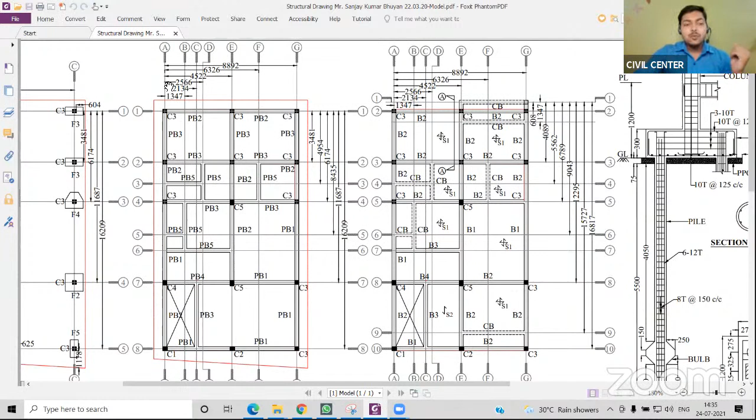Okay, so we have discussed the column positions, and now let's relate this plinth beam layout with the typical beam column layout over here. So you can see all the center lines are almost the same, but we also have a few new lines over here. Why so? Because in the horizontal direction we have the same number of center lines, but in the vertical direction you will find two additional center lines over here. Now why these two additional center lines are present, that we will discuss in just a few minutes.

Then the columns will be the same as they were on the plinth beam unless you have any floating column. So from the viewers, I would like to know what floating columns are. In this project we have not used floating columns, but if you are looking at a drawing like this and you find a particular column absent in the plinth beam layout and that column is present in the beam column layout, then you can understand that's because of the presence of floating columns.

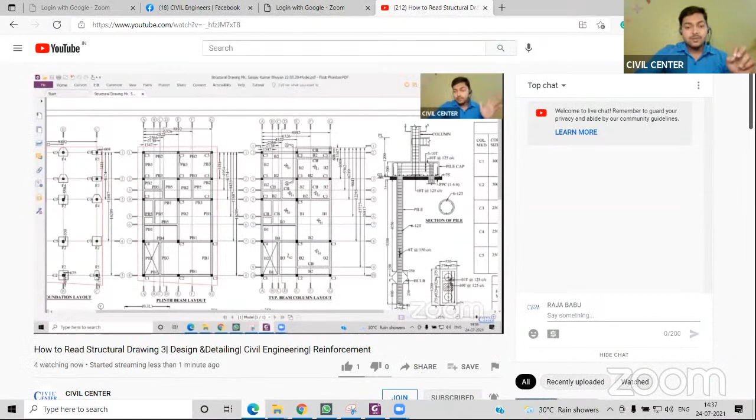Okay, so next, we have this beam arrangement over here. Now in the last live session I told you why the beams are arranged in this way.

So I have told you that the beams are present wherever we have the walls, and these beams are taking the loads of the walls. Okay, now there is one additional type of beam in our beam column layout, and this beam is known as

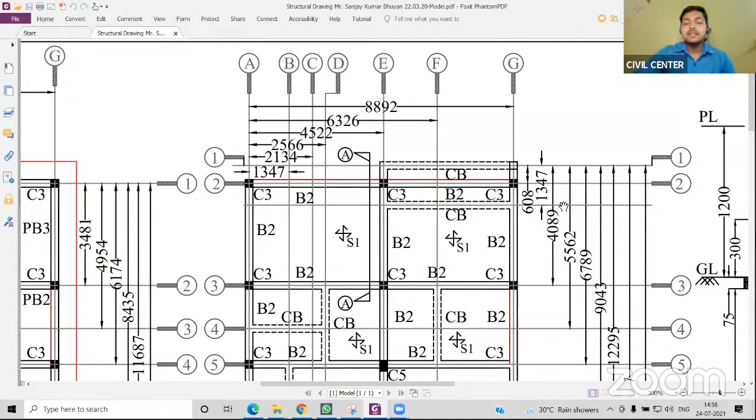Okay, so you can see over here we have these center lines, and we have taken the measurement from A to B, then A to C, and not from A to B and B to C. And this is done to maintain the accuracy while doing the construction, so that if you are making any error while marking any footing or any of the columns, you do not repeat the mistake in the next column or footing. So to avoid such mistakes, we have to go with this pattern of measurement. Okay, so this is to maintain the accuracy.

Now we have different types of columns over here, and from the column schedule, we know that we have these 5 types of columns. Okay, so guys, I think this is quite clear because I have explained all these things in the previous session also. Now what is the new thing over here? We have the conceal beam over here, and because of this new conceal beam in our structural drawing, we had to draw another center line.

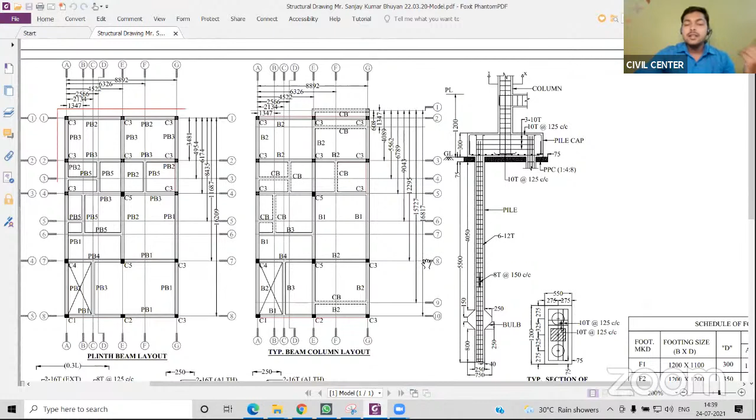And since we are drawing another center line, we will not go with the previous names over here, so we will rename all the center lines. Like previously, this center line 2 was center line 1 in the case of the plinth beam, so we go for the renaming so that we can easily do the measurements, and that's why we have additional center lines in the beam column layout. Okay, so because of the presence of the conceal beams, this happened.

Now why do these conceal beams have to be provided? There is a simple answer for that. These conceal beams will take the loads of the walls. Okay, and what kind of walls? Over here you can see this is taking the load of the balcony walls. So these are just lighter walls. At some places you will find that this is a concrete wall.

In the balcony you can find brick walls, and you can also find some kind of handrails, which can be of iron or of steel. Steel is in demand these days, but there are also people who go for brick walls and also iron handrails.

Okay, so these are lighter over here, and these do not extend up to the complete floor, so they have a height of almost 3 feet to 3.5 feet. So they are lighter in weight, and we don't need an actual beam over there. So for that we are going for the conceal beam over here. Okay.

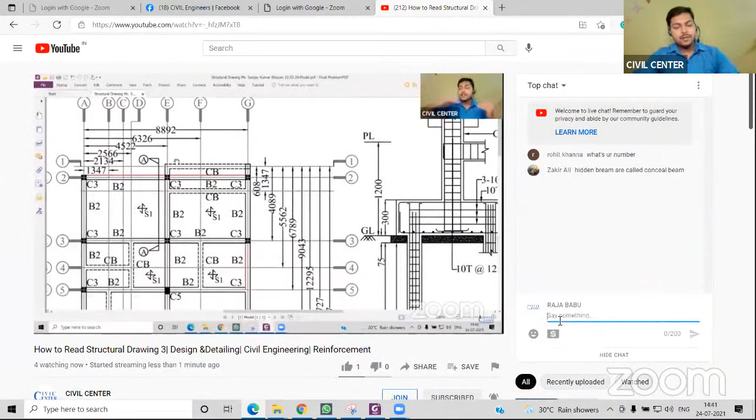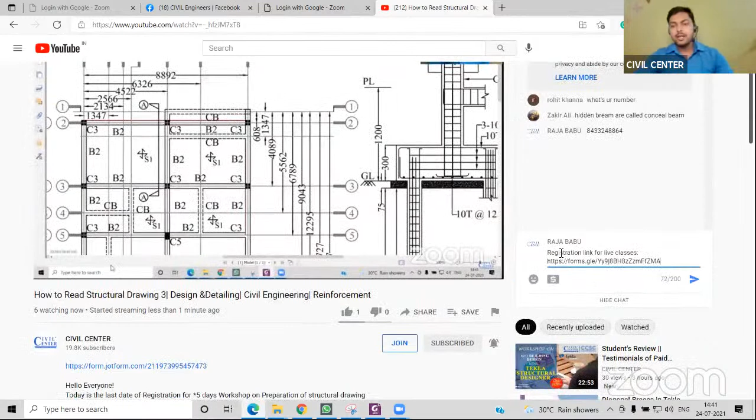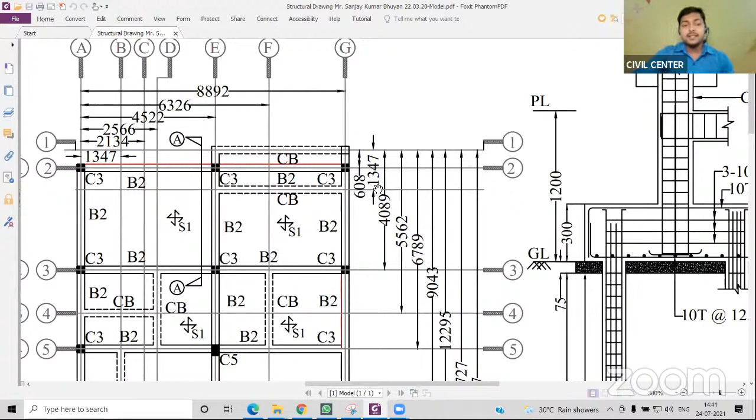Next we have Zakir Ali, and he is saying that hidden beams are called conceal beams. Okay, so that is a correct answer. So now the question is how we can hide any beam. And the answer is there in the beam column schedule. So we will just go to the schedule of beams over here, and we will look at the depth of the conceal beams.

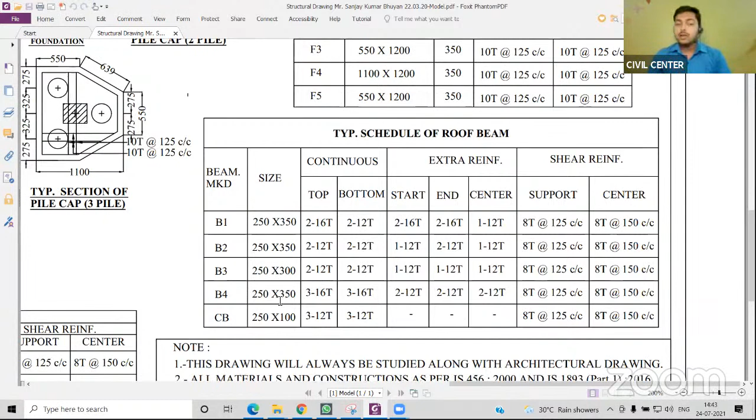Means if your slab is of thickness 150, then you can go for concealed beams of thickness 150. Okay, so the basic concept is the depth of the beam is equal to the thickness of the slab, and such beams are not visible, so they can be known as hidden or concealed beams. Okay, so that's the correct answer, Zakir Ali.

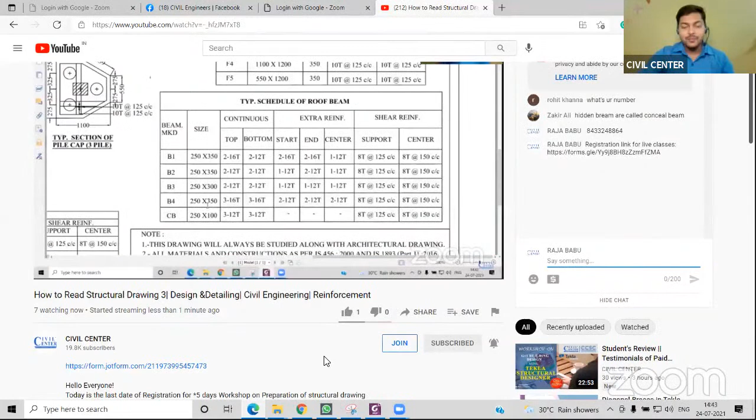Okay, thank you. Next, we can see that in our beam column layout we have new beams over here, and mostly these beams are concealed beams. And one more thing to be noticed: we have this cross sign over here. This is showing that no slab is present over here, that means the slab is absent. And this is a portion of the staircase, so in the portion of the staircase and lifts you will find this sign, which means the slab is absent in this portion.

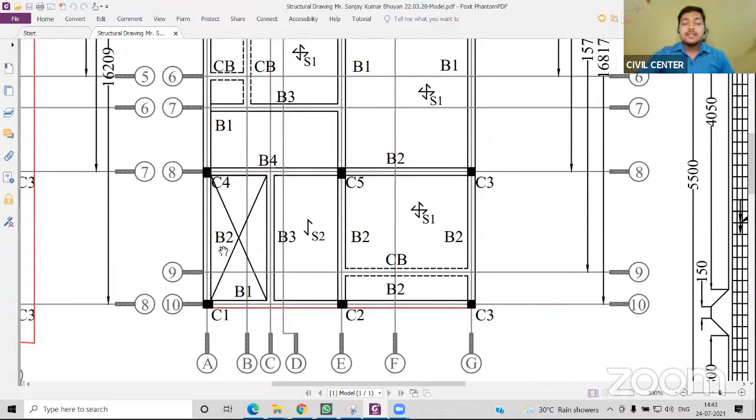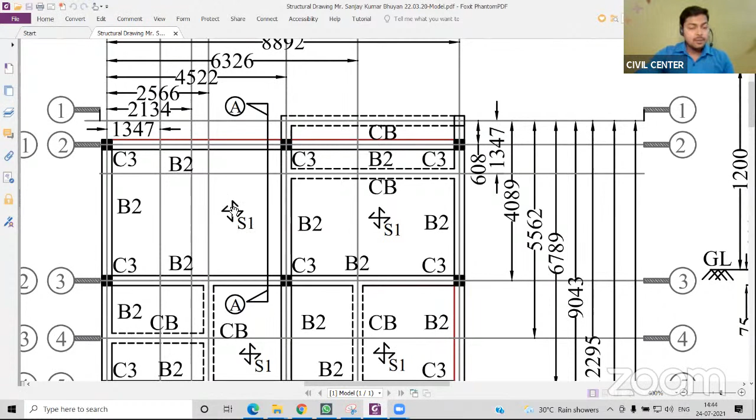So this is the way to study the beam column layout. Okay, and in all the portions where we don't have any cross sign, we have the slab present. Now we can see one more thing over here, we have cut out a section AA, and this is a section for the slab. So you can see we have a two-way slab over here, and this is the sign of a two-way slab. Okay, and this is the sign of a one-way slab. So there are basically two types of slab being used in this beam column layout.

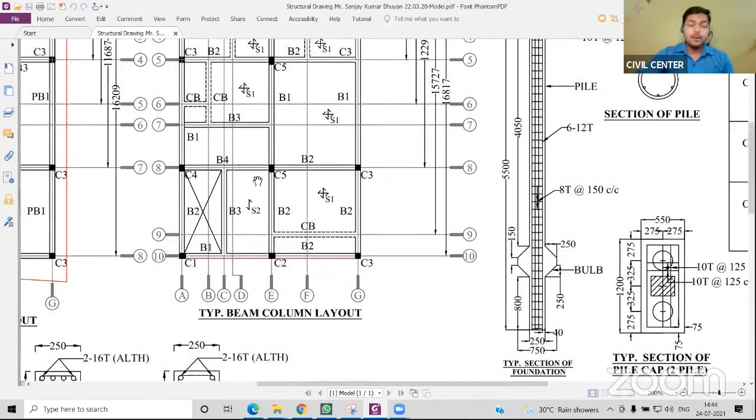Okay, so you can also go for the signs of the slab, and we will talk in detail about the slabs when we discuss them. Right now we will stick to the beam column layout and discuss the beams and the columns. The column has already been described. Now let's go to the schedule of the roof beam. So the concealed beam size has been explained. Now let's take an example of beam B1.

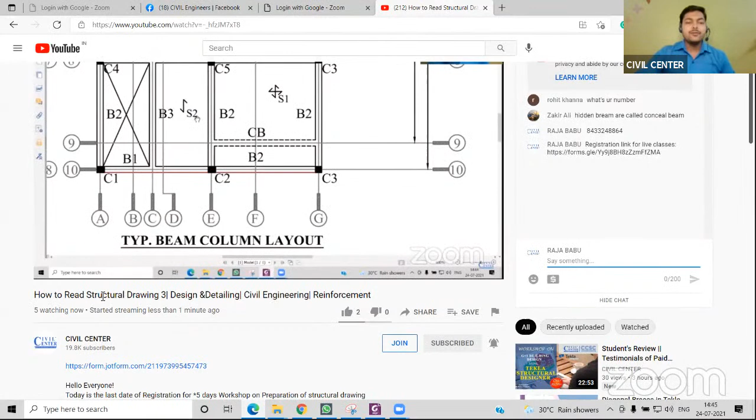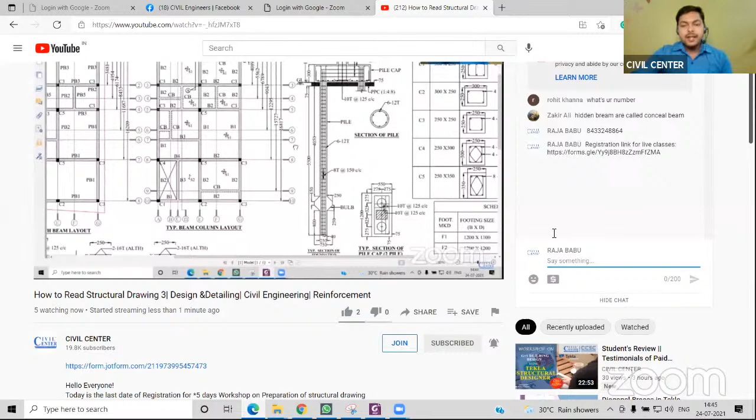Next, we have this beam B1, and over here you can see we have the size of 250 by 350, and we have three types of reinforcement. The first one is the continuous reinforcement, the second one is the extra reinforcement, and the third one is the shear reinforcement. Okay, so in the continuous reinforcement we have top and bottom, that is, reinforcement is present at the top and the bottom.

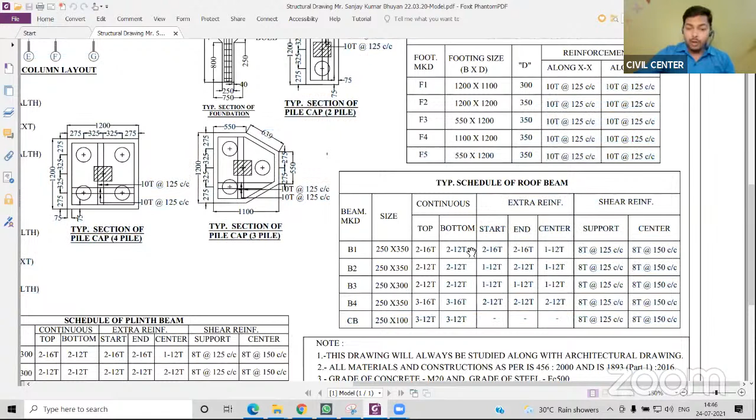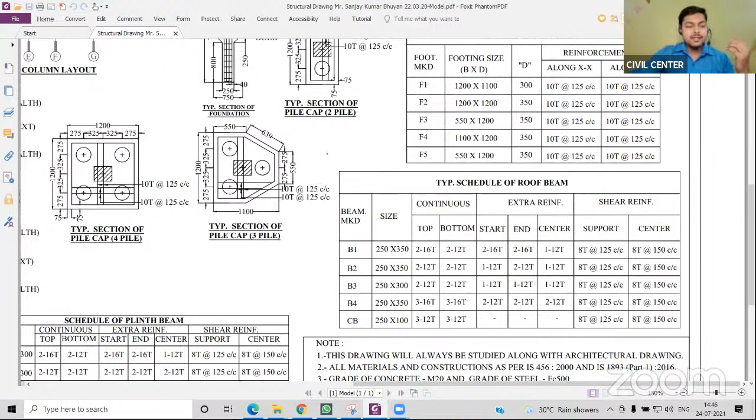That means we have to go for 2 bars of 16 mm dia all through at the top, and 2 bars of 12 mm dia all through at the bottom. So these are the main reinforcements. Then come the extra reinforcements. These extra reinforcements are not provided for the complete length of the beam. They are restricted to a particular distance, and how much distance they are restricted to, we will see from this image. Okay, we will also learn about that, but let's stick to the extra reinforcement over here.

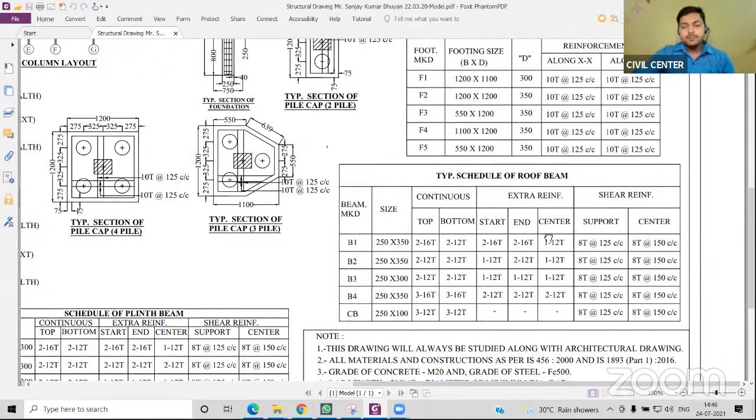So you can see at the start, end and center we have this extra reinforcement, and then comes the shear reinforcement. So these are the rings that you can see in the beams. Technically we call those rings stirrups in the case of beams. And my question is, what are those rings called in the case of columns? So for the beams they are called stirrups.

Next, and you can also answer me, what are the rings called in case of columns? Like in case of beam, we call them stirrups.

Okay. Now let's go to the stirrups over here. So there are different spacing for the stirrups at the support and the center. In the center the spacing is larger, and at the support the spacing is slightly less than what we have provided at the center. Okay, and why is it so? Because we need more reinforcement at the support and less reinforcement at the center. That's why we have provided more spacing at the center and less spacing for the stirrups at the supports.

Next comes the all through bars, which are quite clear, so I don't think there is any need of explanation for that. But even if you need an explanation, you can simply write that in the comment section and I will definitely explain that.

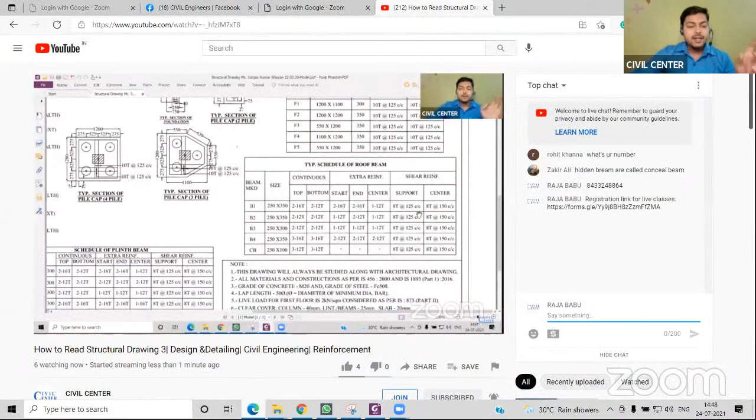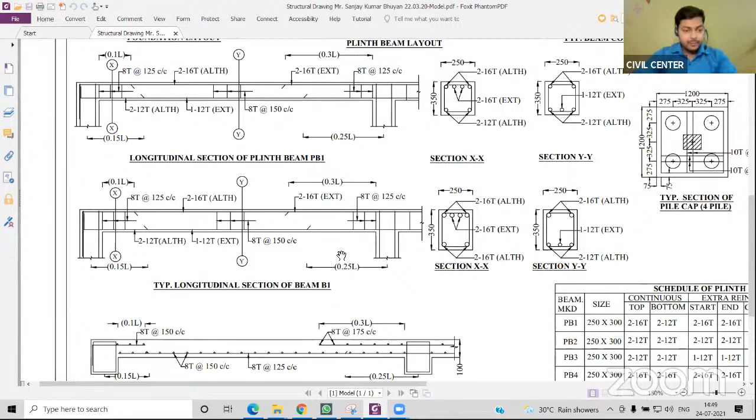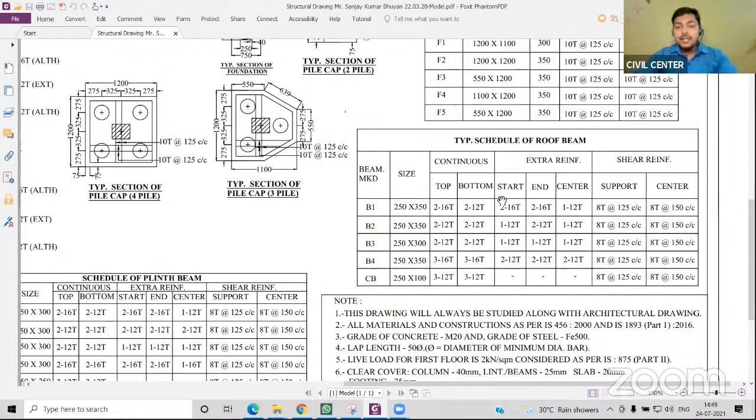So in the beam schedule you will find that you have to provide some extra reinforcement at the start and at the end. So this is the type and the number of the bar that will be used, and in the drawing you will see the length of the bar that should be used. So for the top reinforcement we have to go for a length of 0.1 L in case of discontinuous beams, and if this beam is continuing then we will go for a length of 0.3 L. Now L is the length of the beam over here.

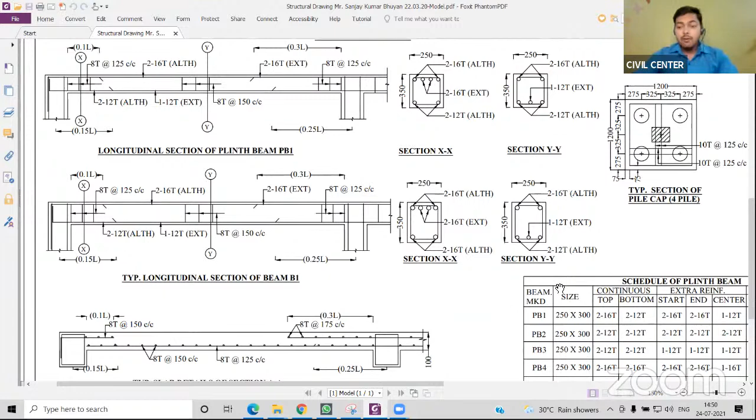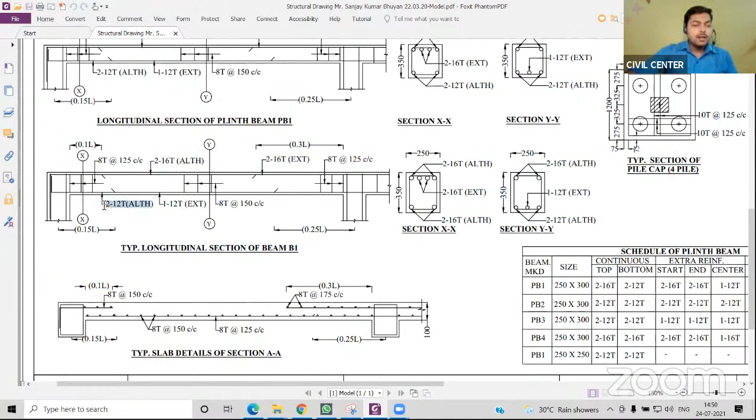Now at the bottom we have to provide the extra reinforcement in the center. So even in the bottom it will not go all through in case of extra reinforcement. However, the main reinforcement, that is in this case 2-12, will go all through. That means it will start from one end and it will go till the other end of the beam. Okay, so you can see we have two bars of 12 mm dia and it is going all through over here. Okay, then comes the extra reinforcement.

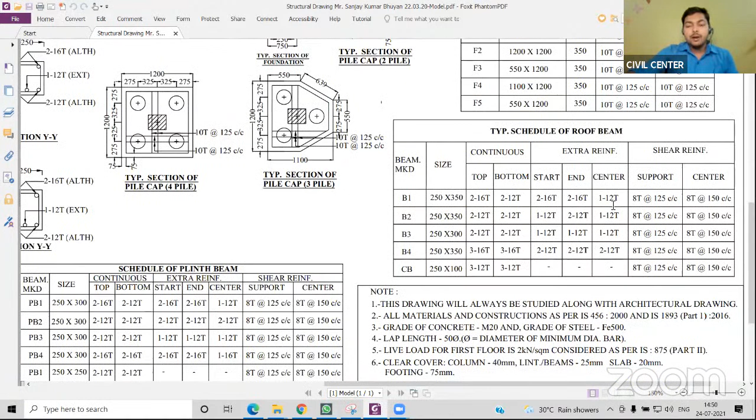This extra reinforcement from the schedule, for the B1 we have one bar of 12 mm dia and that will be provided at the bottom of the beam. Okay, now if we are providing something at the bottom and it is not going all through, then there must be some kind of distance specified for this one too. So from the dead ends, or you can say discontinuous end, we will take a distance of 0.15 L, and from the continuous end we will go for a distance of 0.25 L.

Okay, now on the top and in the bottom there is a little difference in the measurement. So what is your observation for this?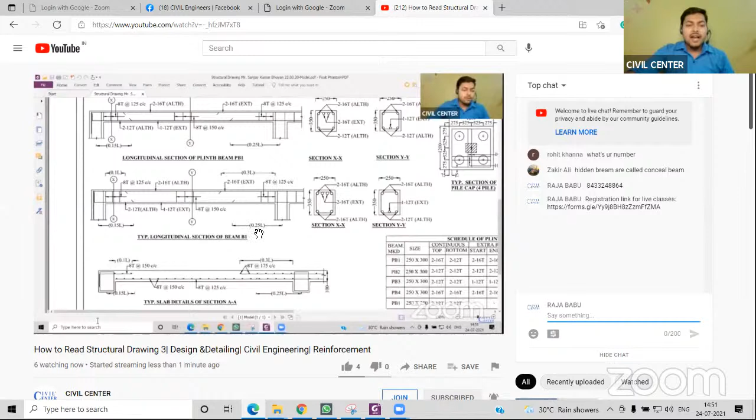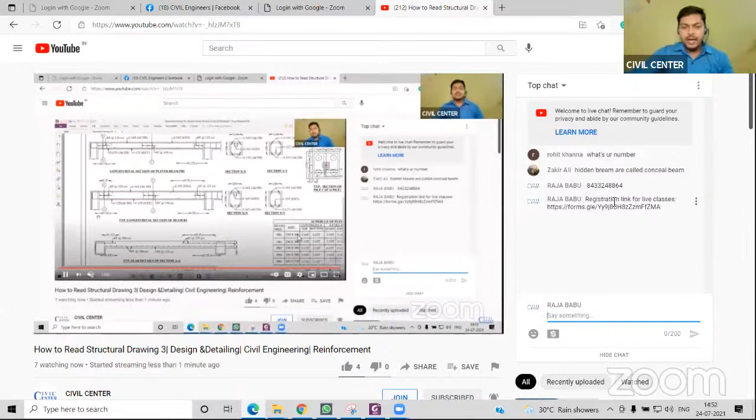Okay, now if you have any kind of question you can simply ask that, and if someone is willing to answer then you can also answer, like why is there some kind of difference at the top and the bottom. Okay, and what is that difference that you can observe from this drawing. Okay, so we will wait for just 20 seconds more to get the answer over here. So guys, you can answer what is the difference that you can notice over here for the measurement on the top and at the bottom. What's the difference? Please answer.

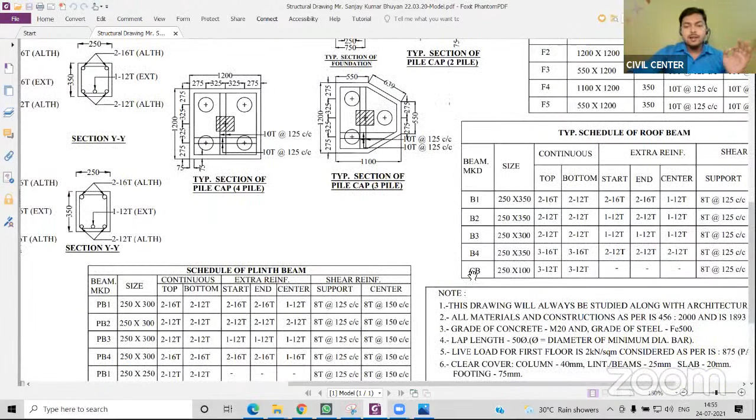So even in the structural drawing you can see, I will just show you, we don't have multiple types of the columns over here, or multiple types of the plinth beams. We have just 5 types of beams in total, including the concealed beams. And when it comes to the columns, we have just 5 types. But in the software, if we have suppose 18 columns, then you will find at least 9 different types of columns. So that's the way the software designs the structure.

But when we go for the practical application, we can't go for that many types of columns. Why so? Because it will be hard for the contractor or even the site engineer to make it happen, because the resources are limited out there. They have limited types of formwork, and for the varying sizes you will have to go for different types of formwork also.

And if you are going for the minimum types of columns or beams, then it will be easy for the laborers to execute the work properly. Otherwise they may get confused and it may be a bigger loss for your client. Okay, so that is one thing that we have to go for.

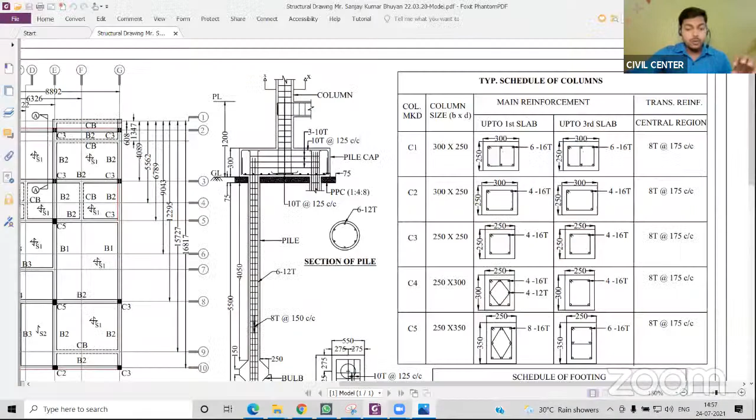First of all, let's understand why this workshop is important. Now what is the next thing that we have to do? Next, when we finalize the design results by interpreting them, then we will go for the preparation of the structural drawing. So in this live session, or in this series of live sessions, you are learning how to read such a structural drawing.

And if you are properly studying a structural drawing, then you can easily find a job as a site engineer. So basically the site engineer should know three basic things. First, he must know how to read the architectural drawing. Second, he must know how to study the structural drawing. And third, estimation is also a crucial point for site engineers.

But for freshers, even if you just know how to read the structural drawing, then you can find a job. So we have started this free series on how to study the structural drawing. And if you want to learn how to prepare it, and you know how to design any building, then you can simply learn how to prepare the structural drawing in this workshop.

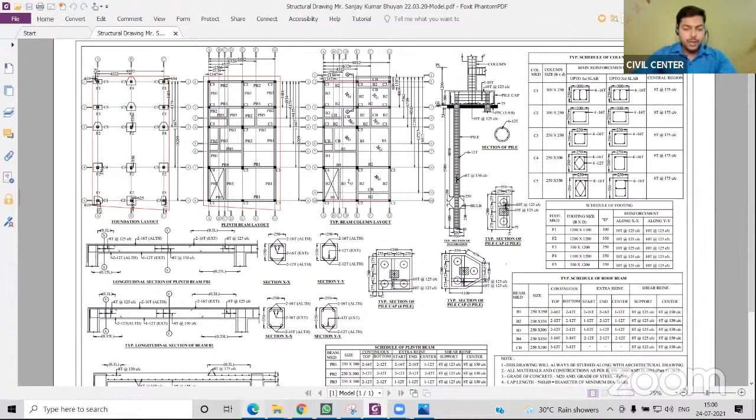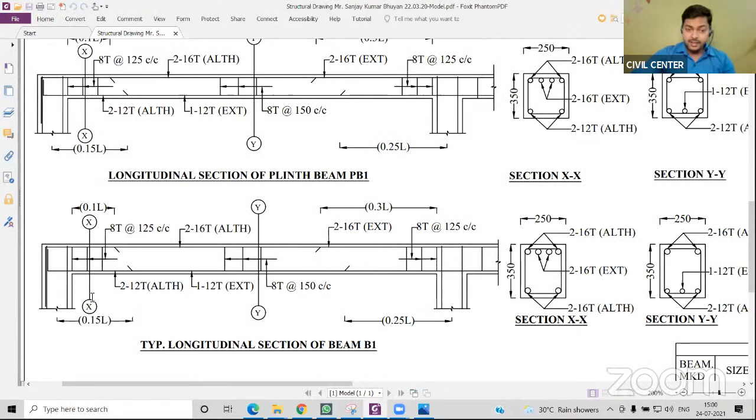Yeah. Next, let's go to the structural drawing reading. We have covered the longitudinal section of the beams. Now if we cut two different sections, one at the end, that is XX, and one at the center, that is YY, then you will see that we have got such a drawing. Here you will find the main reinforcement at the top, main reinforcement at the bottom, and also the extra reinforcement at the top.

In the bottom you will not find any kind of extra reinforcement, because we don't have any extra reinforcement at the bottom in the beam. Why so? Because we have to provide that in the center portion only, and at the ends we don't provide extra reinforcement at the bottom in case of beams. So this is a 250 by 350 beam, and 350 is the depth of the beam. For the main reinforcement at the top, we have two numbers of 16 mm dia bars, which go all through.

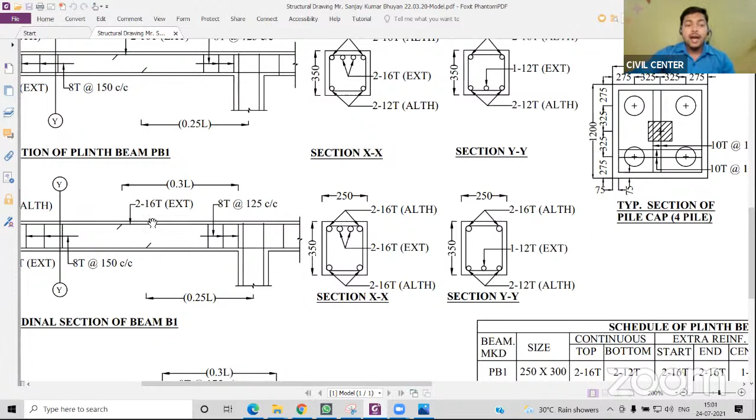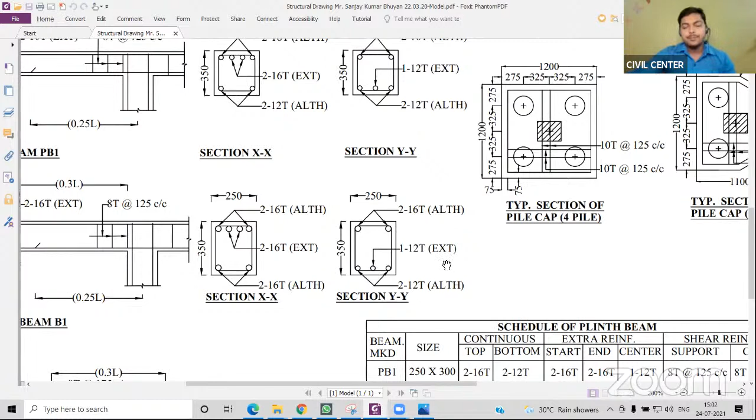We have two extra reinforcement bars of 16 dia, and if it is a discontinuous beam then we go for a length of 0.1 L, and if it is a continuous beam then we go for a length of 0.3 L. At the bottom we have this 2-16T also, which is the same as the top one. At the YY section, here is some kind of error. We have to go for 2-12T, because in the schedule we have 2-12T over here.

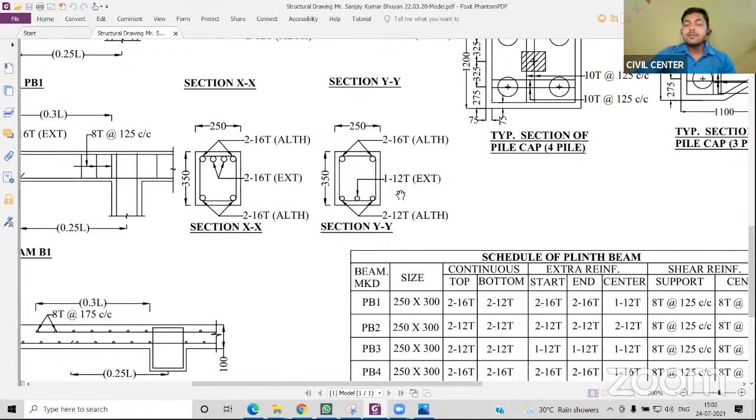Then for the section YY, at the top you will see we have two bars of 16 mm dia going all through. We have two bars of 12 mm dia going all through at the bottom. So top and bottom bars have been explained. Now in the center we will have the extra reinforcement at the bottom, and this will be one bar of 12 mm dia.

Now what is the length of this? We will leave a distance of 0.15 L from the discontinuous end and 0.25 L from the continuous ends, and whatever distance is there in the center, we will provide the reinforcement over there. On the top we are measuring the distance from the end where the column ends, but in this case we will measure the distance from the center of the columns.

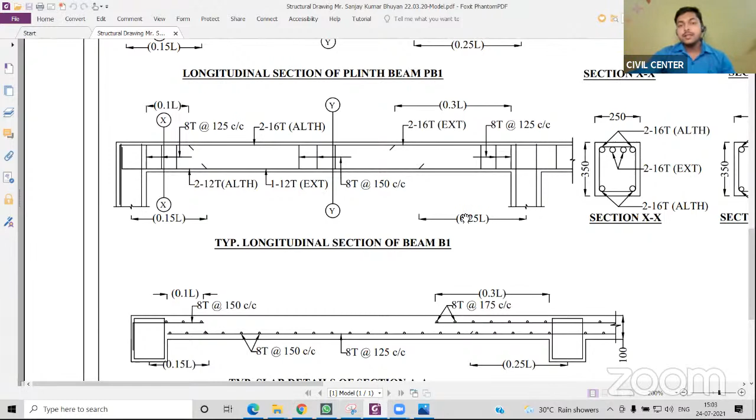Okay, so that is the difference for taking the measurement in the case of beam for the extra bars.

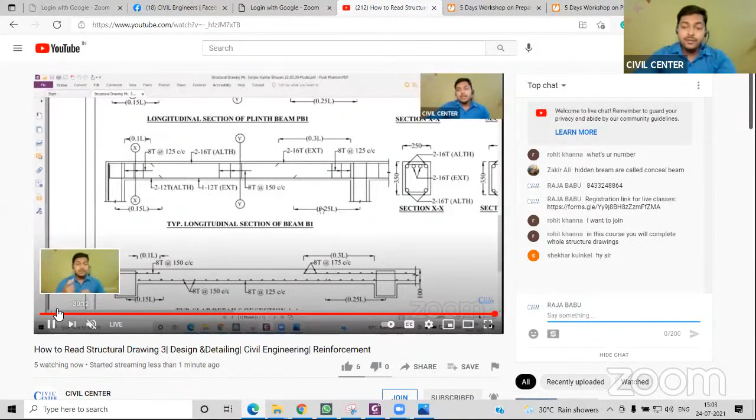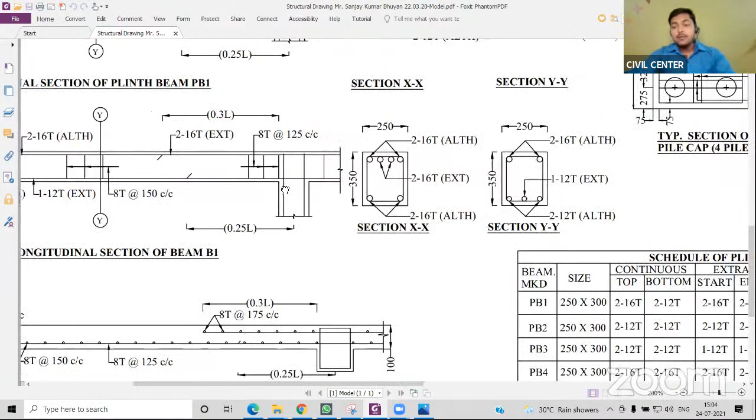So we have learned how to study the longitudinal section of the beam, how to study the cross section of the beams at the ends and at the centers. We have also learned how to study the schedule of the roof beam. So basically we can say even this typical beam column layout has been completed. So we can say we have covered the roof beam section completely in this live session.

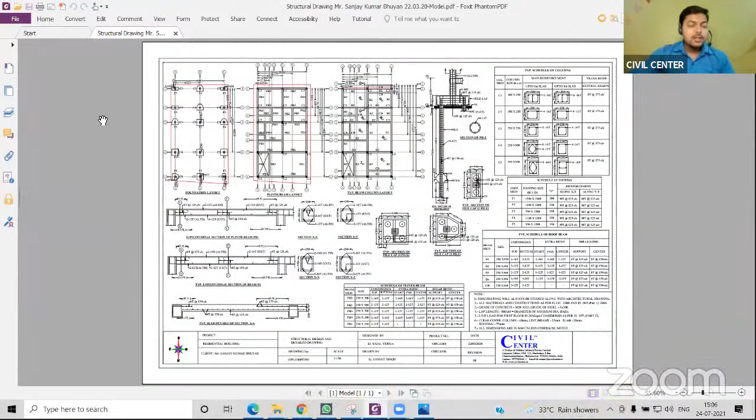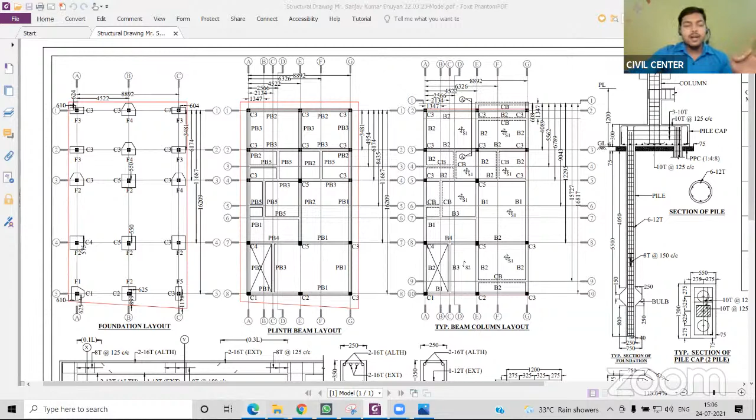Okay, so guys, that was all for today. And what are we going to learn in the next live session? That we can just go for the voting. So in the next live session we are left with two options. Either we can go ahead and study about the slabs, or we can go ahead and study about the foundation. So these are the two options that you can pick, and I will go with the maximum number of votes. So do suggest in the comment section what you want to learn in the next live session, foundation or slab. Guys, I'm just waiting for your answers, leave the comment in the comment section, and we will go with the maximum votes. So whatever you want, just feel free to write in the comment section.